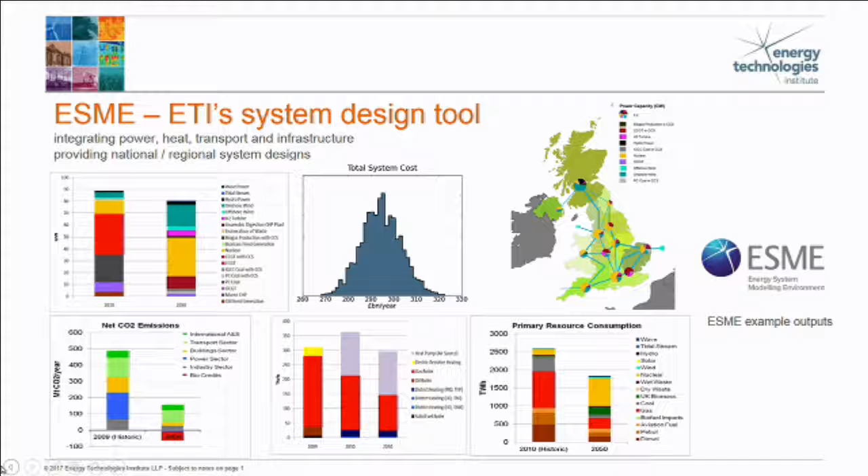So this is a slide I've added at the last minute based upon some of the discussion yesterday from the Volvo presentations and the JRC presentations, where we started to talk about certain things we can do which make sense based upon the price of fuel. So they pay themselves back in 12, 18 months. There are some things that perhaps sit on the borderline where, if we start reporting, we'll see a little bit more certainty of pull through of technology.

And what we've tried to start to do is to say, can we create a design space which we could present back to the industry to say, if you could do something in this space, you would be competitive with all the other things that could be done within the energy system. So effectively doing a comparison between the cost of abating carbon in a truck versus building a nuclear power station, or the offset between an offshore wind farm and a truck. So the charts are a little bit complex, but think of it as an opportunity for the industry based upon carbon price to do as much as it can.

And in this, I show a couple of charts. You remember I said that some negative carbon gets created by growing biocrop, pulling CO2 out of the system, burning it, capturing the CO2, and then injecting it under the North Sea. That's the one on the left. If I take that ability away, I generate the curves on the right.

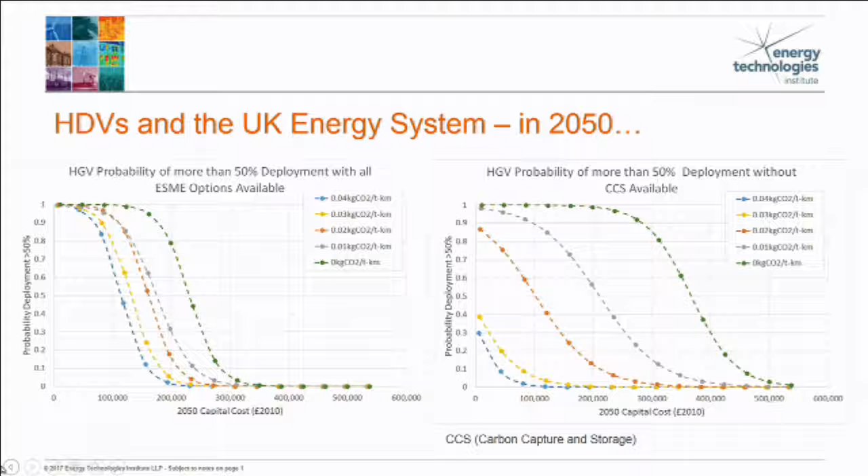The last thing on this chart, because I need to get to some efficiency technologies, is that obviously I'm showing you 2050. So the question is, when do we go from the current view on cost, which is fuel driven, to this potential, different future? I think that's probably the 2030, 2035 timeframe. So really, I think in two time steps. One is, between now and 2035, 2040, how do I be as efficient as I can? And then post that point, how do I transition into something that's even lower carbon again? And at that point, I probably need to think about other energy vectors, other sources of energy other than hydrocarbon. So hopefully that ties into some of the discussions we had yesterday, and is a useful input.

So what I'm going to talk about now is more about our thought process between now and 2035, 2040, and the work that we're doing to try and inform and influence that time period. Because from a Paris point of view, it's not just what we do in 2050, it's also the amount that we emit on the journey between now and 2050. So as we look at heavy-duty vehicles, you can see that there's a range of emitters. The biggest proportion is on highway, but off highway is significant, and therefore we've felt that we've had to tackle both on and off highway. Marine's not included in this chart, but we're also doing work in marine as well. So we're trying to take a holistic view and tackle the CO2 performance of all of those different sectors, and trying to use common technologies to achieve that.

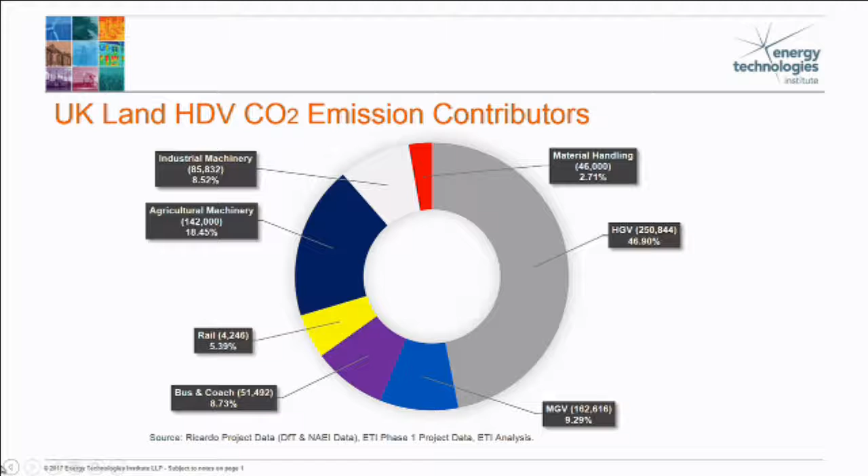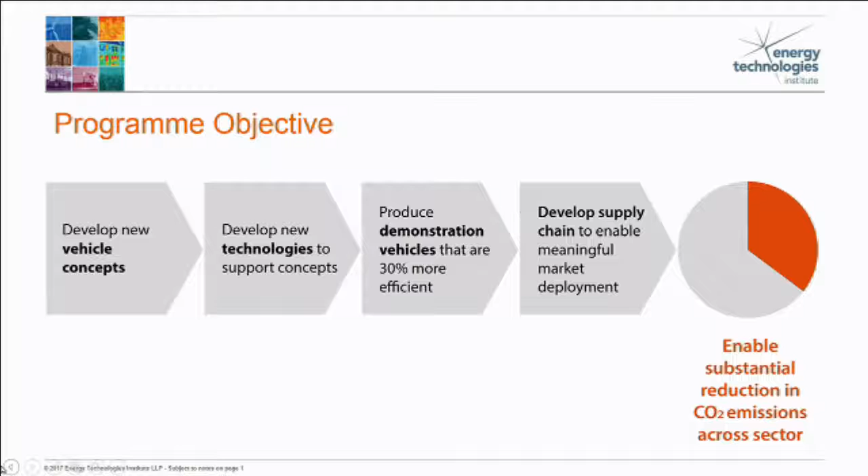So based upon that, we created a program. We set ourselves the objective to achieve at least a 30% reduction in greenhouse gas emissions. And what we wanted to do is create a program which didn't constrain the engineers in achieving that goal. So it allowed new vehicle concepts and simultaneously new technologies to be developed. And then we want to pull that together into scale demonstrations, so physical vehicles and vessels that show that performance is achievable. And hopefully through those demonstrations, convince the supply chain and the OEMs that there is something of interest here that they'd like to deploy and put into the market. And through that, achieve our overall aim, which is a meaningful impact to the greenhouse gas performance of heavy-duty vehicles.

So just to take you through the steps that we went through, this chart's got land and marine, but for today I'm going to focus on the land side of things. So we created high-fidelity models of 6 vehicle archetypes, both on and off highway, and used these computer models with input of real-world cycles to understand the best set of technologies to deliver our 30% target. That concluded at the back end of 2013. And then off the back of that, we commissioned a range of technology development projects. It's probably worth pointing out that the ETI doesn't do all the hard work. We put calls out for people to bid in on them, and then people help us to develop those technologies, and we fund that work.

And so we've done a range of projects which are listed up there. Too much to go through today, so I've picked out one as an example, which is the Continuously Variable Transmission project. We've also done, particularly pertinent to this conference, an SCR project. Some of that links to Jonathan Wilson's work from Loughborough as well, so I'm not going to go through that in too much detail, and I'd welcome a discussion after this or with Jonathan on his work, which he presented yesterday.

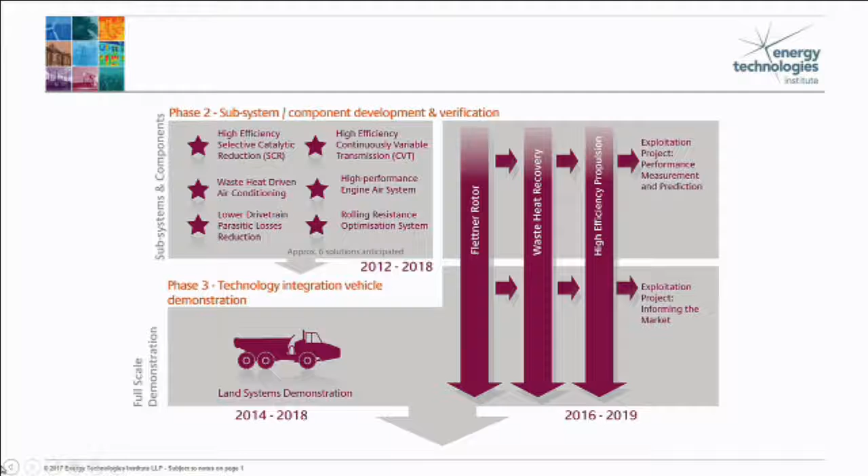And then those projects all culminate in a systems demonstration, which is ongoing. The final version of that demonstration will be in 2018. And currently, that demonstration will be on an off-highway truck initially. And this is just to say that hopefully the OEMs can see, well, look, the technologies have been de-risked and have been developed, they're mature. I can think about adopting them into my product cycles. The supply chain can see, okay, I have a value as part of an integrated system, so they can value individual technologies much better. And hopefully that gets everybody moving along towards a better fuel consumption future.

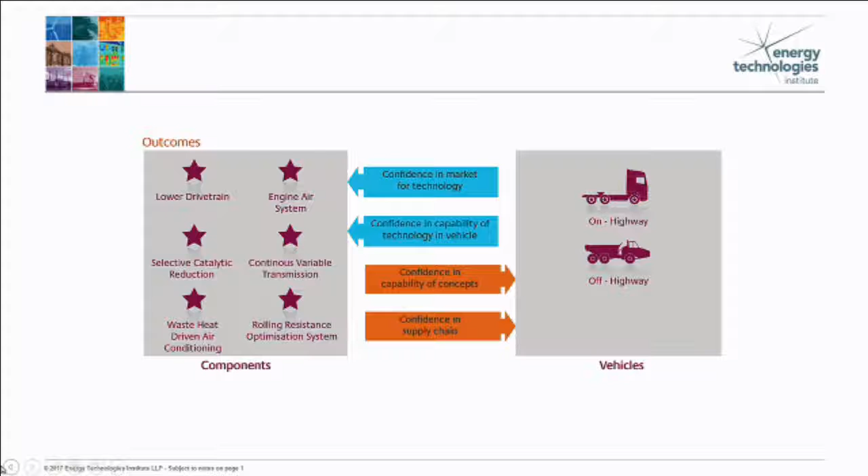I think this slide was already in here, Will, I haven't added this in as a consequence of the previous presentation. But I think we all agree that real-world usage and understanding how things are really used is fundamental to selecting the right technologies. And we've really seen a sensitivity to that through our work. And so we have a project at the moment where we're trying to get thousands of trucks worth of data to understand, okay, what is really going on? And how do we develop the best technologies for that? So we've tried to really take a systems engineering approach, coming at it from the top level and working our way down.

And I think this actually, again, links to some of the other conversations. As we've gone through this work and seen what 5G might do to the telematics market, and obviously linking to the earlier presentation about OBD and the fact that CARB want the NOx sensor reading to be made available, I think from a legislative point of view, you can start to see there might be market-based measures which become more powerful than some of these other legislative processes.

We're already seeing organisations back-calculate the efficiency of the powertrain using telematics data and being able to share that and compare different trucks and different manufacturers and offer advice about what's the best truck to buy based upon this sort of data. So a very similar outcome to what VECTO is trying to achieve, i.e. informing the consumer better about their choices. I think we can see some of these disruptive communication technologies and reporting through OBD could deliver the same impact. And maybe do it in very bespoke ways to the end consumer, a much better experience.

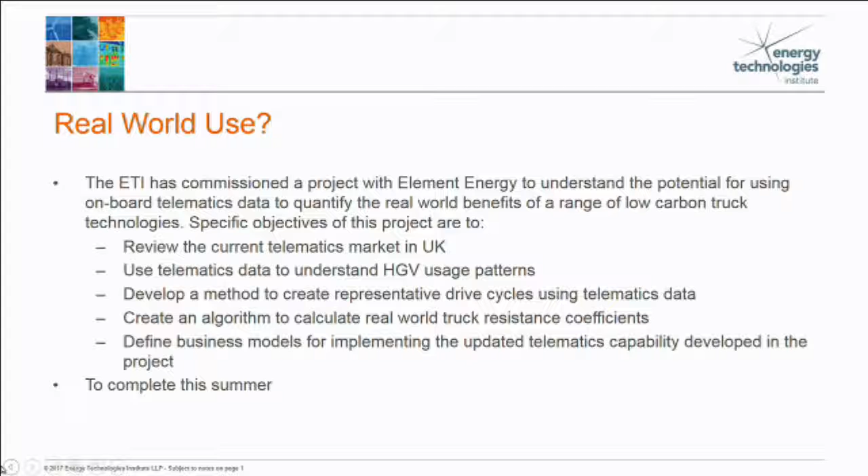So I talked about how we use computer models to come up with optimal vehicle architectures and technologies. The vehicle architecture we ended up with looks like this, and we deployed that across a range of different vehicle types. So it's very similar in the bus, very similar in the off-highway articulated quarry truck, very similar in the HGV. And it deploys, at its heart, a continuously variable transmission. And what we found is when you look at that as an isolated single technology, it looks like a pretty bad thing to do because it's inherently less efficient than an automated manual transmission.

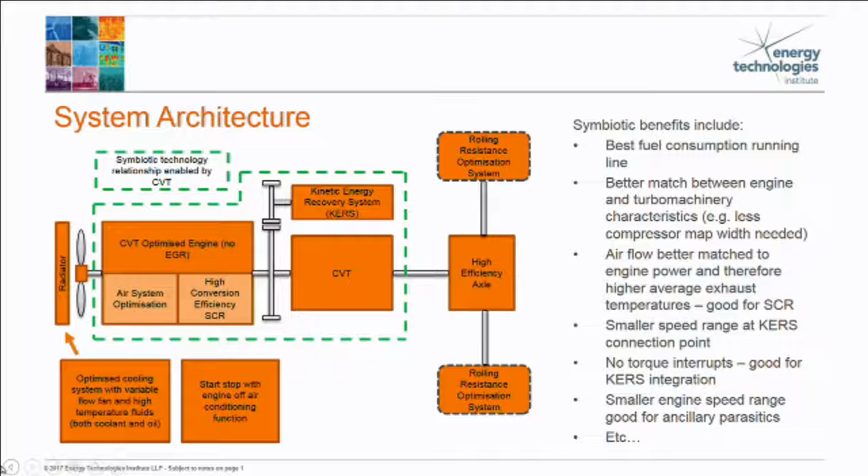And that's great for us because we get to invest once and hopefully see that benefit deployed across a wide range of vehicles. And we were obviously trying to get it as efficient as possible and provide that positive end user payback. So obviously I talked about carbon price at the beginning. That's kind of a 2035 onwards conversation. Right now we want to deliver efficiency between now and then, which is market feasible, 12 to 18 month payback.

And that's what we've been targeting with this. And the whole objective is to minimize the technical risk to a tier one or an OEM. We want to create an engineering package that we can hand over and someone can do something with.

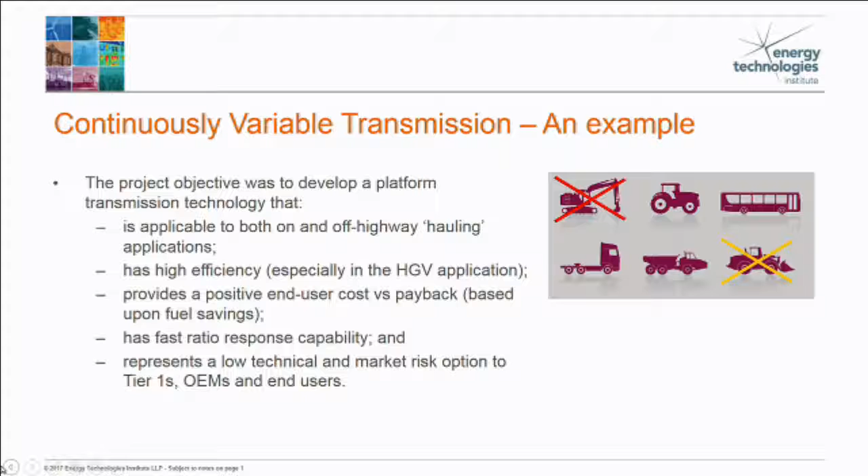The reason it's a hydromechanical CVT is that it currently has a hydraulic variator, but I think as electrical machines improve, then there's the potential to replace that with a more efficient electrical variator, and that gives a nice step forward into an electrified future, potentially.

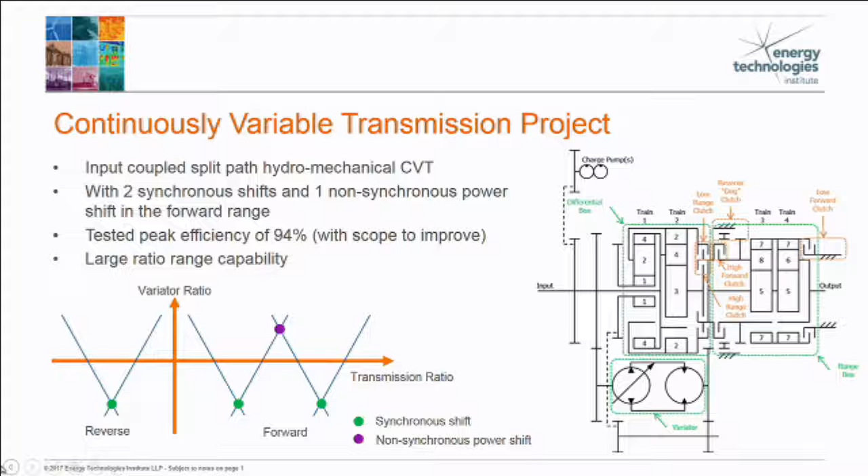One thing about what I'm going to show you is I'm very aware that a lot of people come with new technologies and they can come across as snake oil salesmen. The numbers that I talk about are numbers that we have achieved in our prototype. That prototype has a ratio range of nearly 30, so it's very much set up to achieve the off-highway ratio ranges needed. You do get some trade-off with efficiency, but the efficiencies I'm showing are the ones we've got. We hope to improve those as we go forward, and we're currently working on that as we speak.

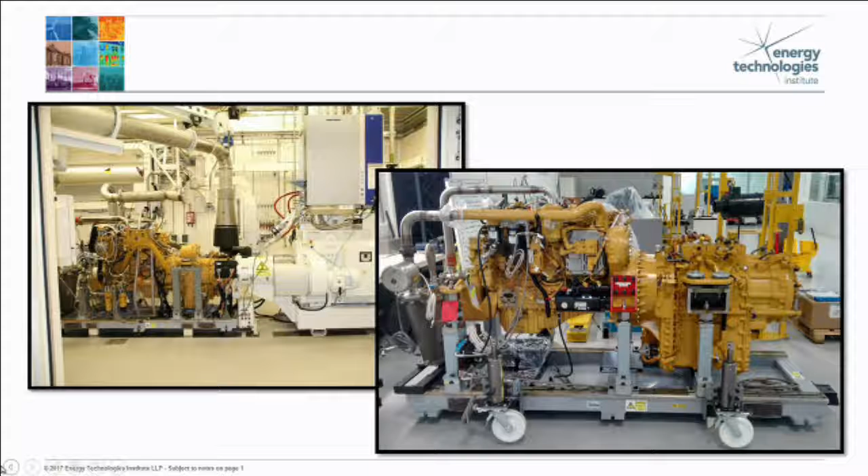So this is a 4-quadrant AC machine, and it can simulate effectively the lower powertrain and the longitudinal dynamics of the vehicles. So we can pretend we're an articulated quarry truck, or we can pretend we're a heavy goods vehicle and develop the technology that way. So I just wanted to point out what the various bits are.

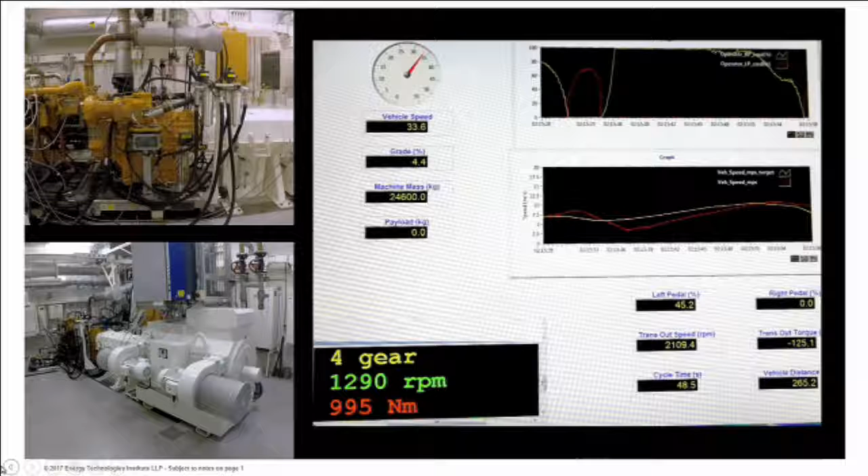I've got a video now just showing this thing operating, but it's a bit hard to see the different elements in that video. So hopefully this will work. So again, just a shot of the test cell. And then you have, apologies, it's not brilliantly visible, but you have left and right pedal at the top, and then vehicle speed, target and achieved, in the bottom chart. And you can see RPM, etc. And this is just to prove it works, that it's real.

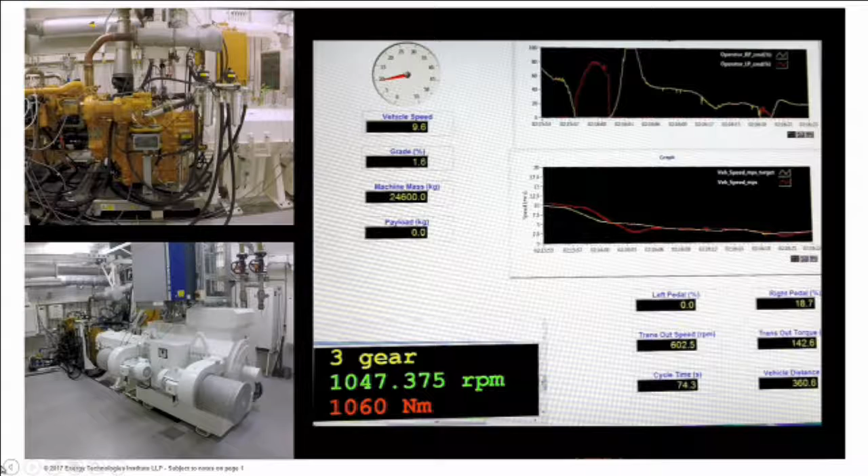So it's effectively currently going through a quarry truck drive cycle. You can see it's got gear on there, which is a bit odd. It's a CVT, but this is just showing you which of the 4 ratios it's in as it sweeps the variator. And you can see engine RPM, and so on. And RPM does change.

You can calibrate it in a range of ways. So, currently we would be targeting the optimum lowest BSFC running line of the engine, but you can make individual choices about how you optimize your system. And because it's got a big ratio range, you can run any engine speed for any ground speed you like, effectively. So one of the big benefits is the de-speeding you get from this transmission.

And it's also very fast reacting, so you can run very low road load RPMs, and if you do hit an incline, you just seamlessly change ratio. There's no bogging down issue or kind of chasing the next gear.

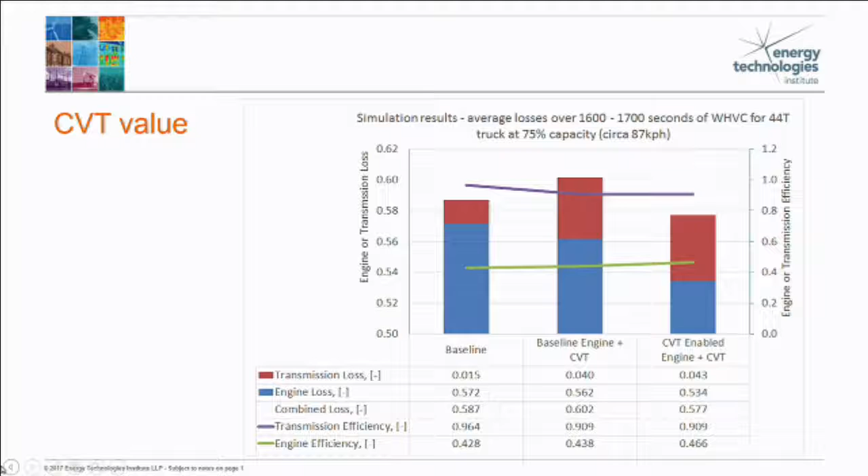So in terms of next steps, we're going to conclude this real-world, how trucks really use, project this summer, and we'll feed that into our technology assessment. We'll conclude the physical testing of the various powertrain elements on the powertrain simulator rig. That will also all go into a vehicle test. We're doing a heavy goods vehicle or line-haul truck focus modelling exercise with AVL, and that will conclude early 2018.

And we also have some opportunity to put some of the tests that AVL would like us to do onto that powertrain rig as well. So we can do some testing which is HGV specific. Look into electric versions of the transmission and try to engage the OEMs and the tier ones in what we're doing so that they can give us yes or no, you've not thought of that, give us some feedback on what we're trying to achieve and engage in it. And we can do that at various levels, which shouldn't be too burdensome for the OEMs and tier ones.

I think the other thing which I haven't mentioned, which again links to an earlier conversation, is we've also been doing some work on natural gas as a fuel. And we will have what we call an insights paper coming out in a couple of months, where we've done a full well-to-motion study of the implications of gas. So that's just a shameless plug for that report, which comes out soon, in terms of really assessing the true holistic greenhouse gas benefit of natural gas as a fuel.

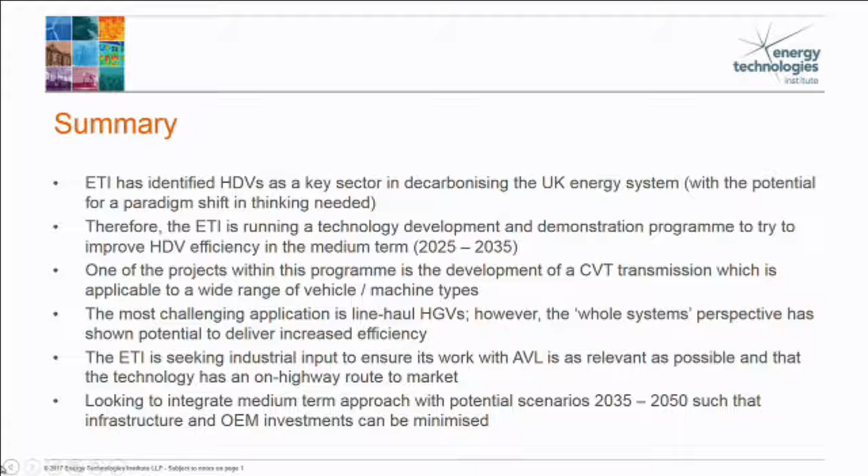One thing I'd like to ask you, Chris, is of course, the focus of the ETI is UK and Europe, but are you looking at the commercial viability of some of these technologies, and if any of them could already be deployed, for example, for the second phase of greenhouse gas legislation in North America?

Yeah, I think that's a good question. We've focused on Europe because that's where we get our trucks from, and so we want to influence the UK vehicle park. So we think about Europe. Obviously, increasingly, you've got Volvo, you've got Daimler, which have ties to the US market. I think for some of our technologies and solutions, we need to do some calculations because obviously the US trucks go quicker and there's a different weight.

So I wouldn't like to say that we are doing anything, and we need to do the calculations to do the value proposition, if you like, before we step across to the US. But we've thought about Japan as maybe a good starting point for some of this, as another alternative to Europe. We want to focus on Europe, see how successful we are. If we struggle, then we'll look elsewhere to deploy the technology.